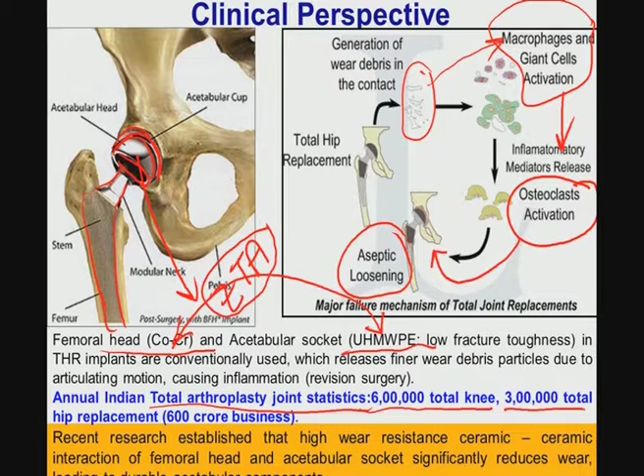Just to give you an idea of how badly the clinical fraternity needs this femoral ball head development: in India itself, according to the total arthroplasty joint statistics, 6 lakhs of total knee and 3 lakhs of total hip replacements are currently conducted. And we have also discussed in one of the earlier modules that we have developed some new material for the acetabular socket, HDPE-HAP-alumina.

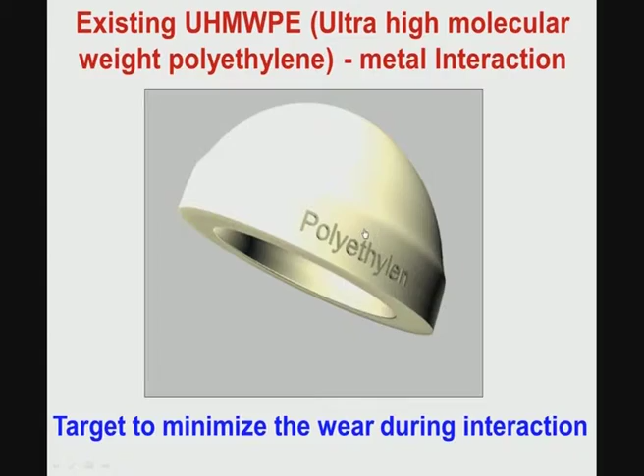So, this is essentially the existing ultra-high molecular weight polyethylene socket, and what we have done is essentially lab scale research to produce different simple shaped materials. So, this is a 10 millimeter diameter cylindrical shape, then you can do 20 or 30 millimeter cylindrical shaped samples as well as some rectangular bars of 40 to 50 millimeter. Now, all these simple shaped materials were developed to measure a number of material properties like hardness, fracture toughness, wear resistance, initial cell compatibility study and so on.

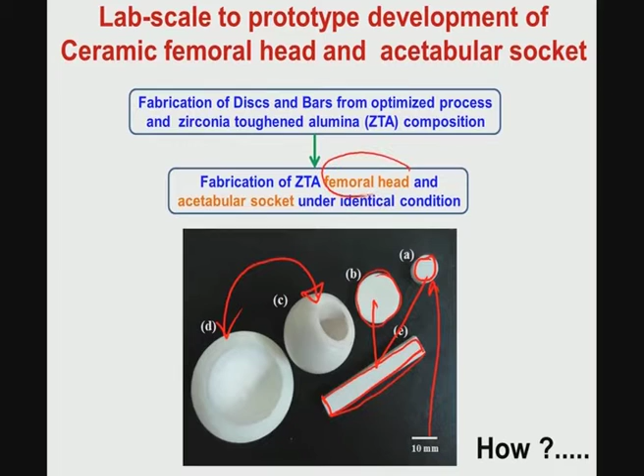But the real challenge is to make these kinds of geometrically complicated shapes, which is not very easy, and often you cannot use the lab scale processing conditions. You cannot adapt the same lab scale sintering conditions to fabricate this kind of acetabular socket or femoral head. So, one has to tune or tailor the lab scale conditions to produce this kind of geometric shape. Now, for this fabrication of the ZTA femoral head and acetabular socket, I will show you at least the femoral head.

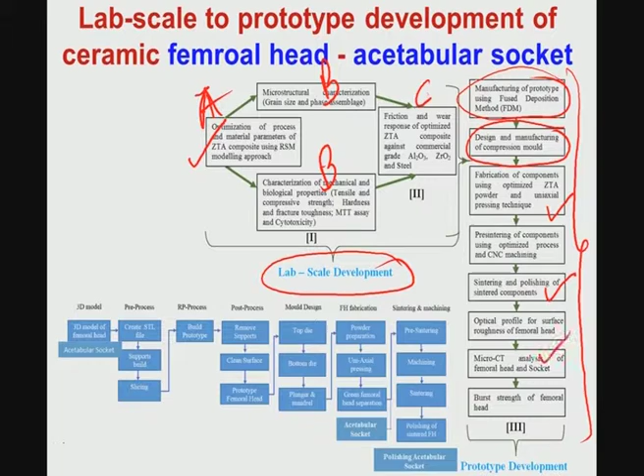And this is the kind of prototype development. It starts with the fused deposition method, FDM, or design and manufacturing of the compression mold, then ZTA uniaxial pressing conditions, which I will explain to you slowly, and sintering and polishing conditions, polishing of the components, optical profile and micro-computed tomography analysis of the femoral head and socket.

Now, there are some earlier results or earlier reports. Many of them are not available in the open literature, because these are patent disclosures or invention disclosures, and these patents are filed in different countries around the world like Japan, France, USA, Germany and China. So, as you see, from 5 different countries we have taken 5 different patents just to illustrate the current status of femoral head development.

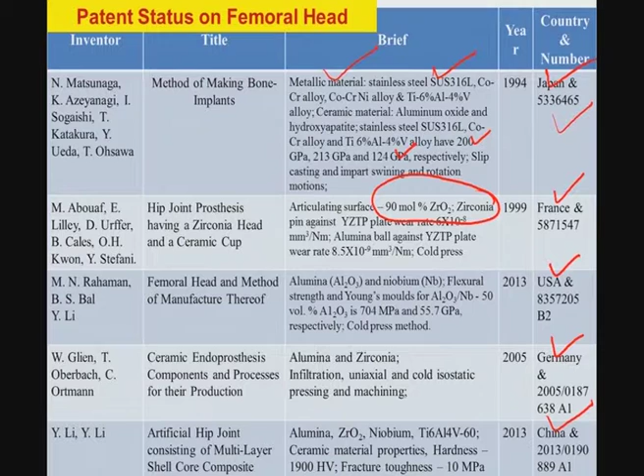Now, mind you that these materials that are patented are mostly either metallic materials like stainless steel or cobalt chrome alloys and so on. They have certain hardness, elastic modulus and strength values, or people have done some 90% zirconia, and one group in the USA developed niobium doped or niobium reinforced alumina, and they have reported the strength and elastic modulus somewhere at 704 MPa and 55.7 GPa.

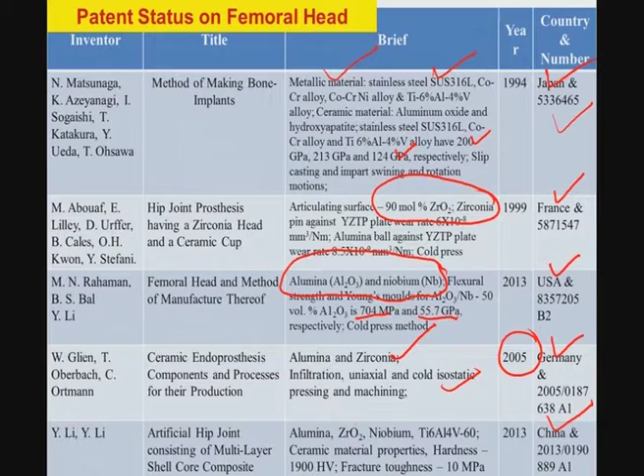One group in Germany patented in 2005 alumina-zirconia with uniaxial and cold isostatic pressing and machining. And another one in China is alumina, zirconia, niobium and Ti-6Al-4V based materials. As I said, the first step for prototype development is the engineering design.

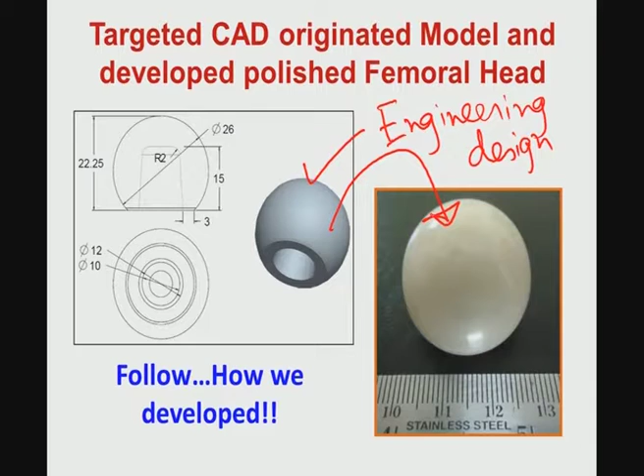So, I am showing you the CAD design file of these materials, and you can see the various dimensions mentioned. Ultimately your aim is to translate the design concept into the prototype product by an integrated manufacturing protocol. So, here again you first have to develop the mold where the ceramic is to be fabricated, and this mold is made by the FDM technique, which is a rapid prototyping technique. You can use ABS as the polymer, which is a very standard polymer used in this prototype fabrication process.

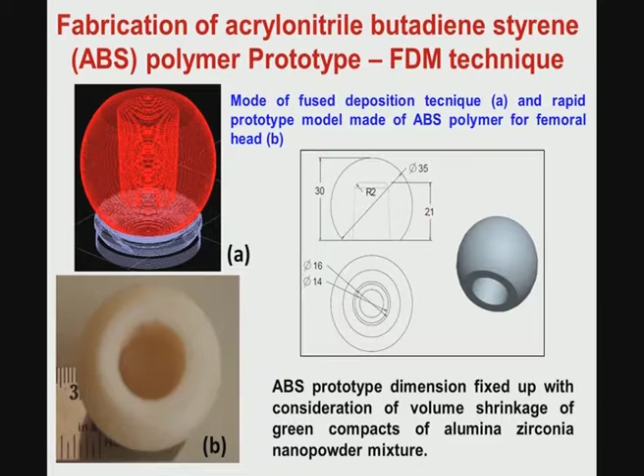Now, after that you do the prototype fabrication, then you make the zirconia and alumina green compact, and then you can do pre-sintering. Green compact means a large uniaxial compaction pressure is applied to this femoral head material to make the green compact. After that you can do the pre-sintering, which can be done at 1200 degrees Celsius and so on.

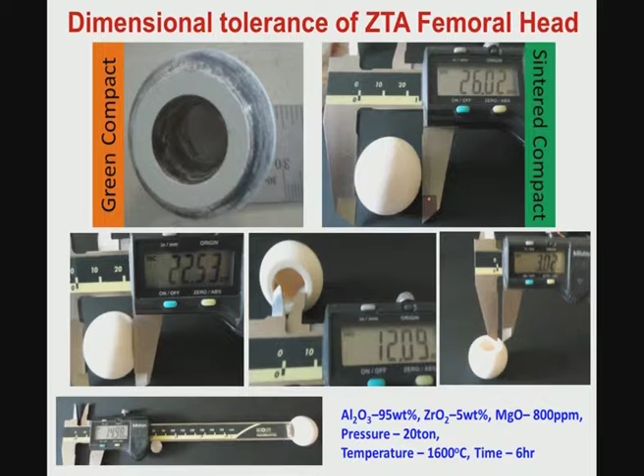And if in the pre-sintered stage the sample goes a little bit away from the original dimension, then you can do very mild machining, because pre-sintered is not fully sintered, but it is good enough that you can do a little bit of machining. So, tailoring the intermediate machining process is very important, and after that you do the final sintering, and then you get the typical wall thickness of this femoral head.

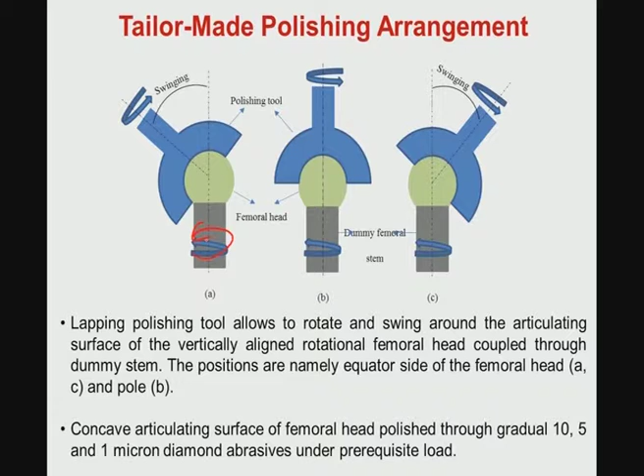Now, one of the important things in this entire manufacturing process is how you polish the final outer surface. This is not simple polishing, because it is not flat sample polishing but curved sample polishing. So, you have to use a swinging type polishing tool, which alternates its position during polishing in a reciprocating motion, and the entire femoral ball head also needs to be rotated during the swinging of the tool. With this technique, you can get the outer surface of the femoral ball head in the right polished condition.

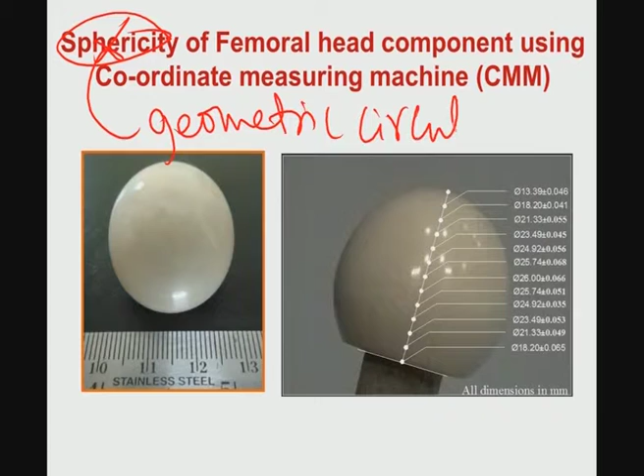Now, one has to measure the sphericity of these materials, which we also call geometric circularity. In this geometric circularity measurement, you can find out the different dimensions of these materials and how smoothly they are polished.

At different points you can measure this and see what is the design file and what is the product file.

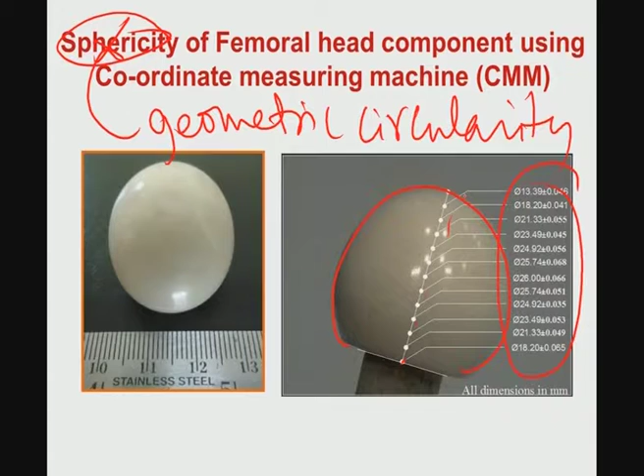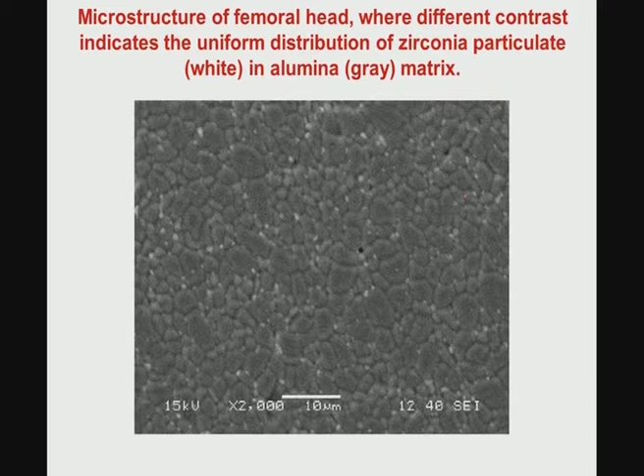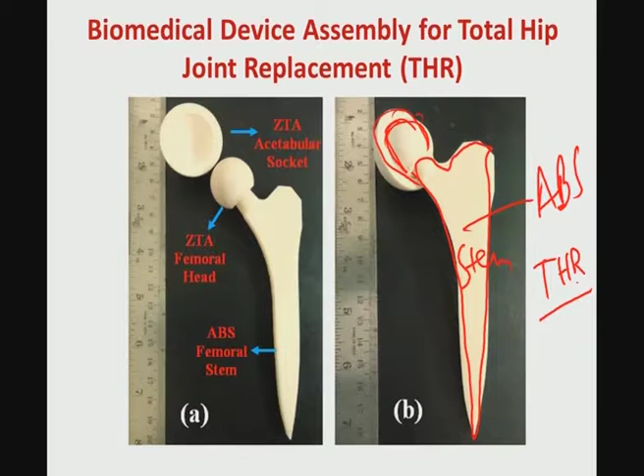Now, just to show how this entire assembly will look, you can make this femoral stem with the help of ABS prototype polymer. Then you can make this stem prototype, put the neck of the stem prototype into the femoral head, and see the geometric conformity of the femoral head with respect to the acetabular socket. So, you see how this entire THR assembly gets fitted with respect to the design file in the actual scenario.

If you compare with commercially available materials, this femoral ball head with this particular process costs at least 1/3 to 1/4 of the cost. Again, this is a very rough estimate, but it shows that the processing approach or integrated manufacturing protocol that we have adopted will be scalable and commercially viable, and is a cost effective technique in the present scenario.

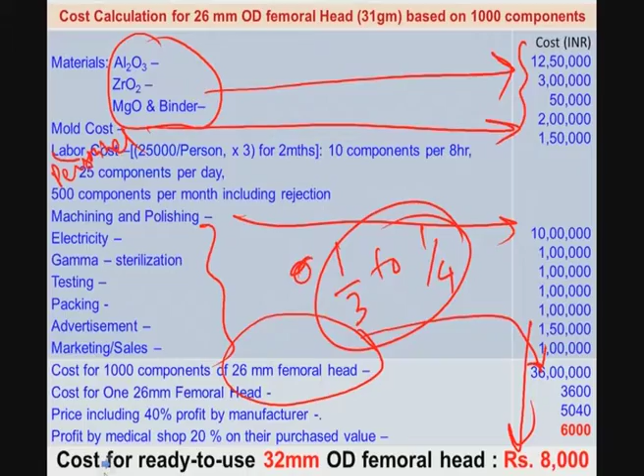Now, this brings us to the end of this particular module, but before I close, I need to summarize this entire course quickly, and I want to do this without any slides, just to give you my own perspective.

So, the first thing in any biomaterials development, you have to design that biomaterial, and designing the biomaterial essentially means you have to first identify the clinical need. In the context of orthopedic applications, first one has to interface with the orthopedic surgeon or the dentist or the prosthodontist and so on.

Then you identify what is the clinical need, you understand what is the clinical need, then you see what are the existing material options. Now, once you know what the existing material options are, you also have to know what the problems with the existing material options are. Once you know the existing problems with the currently clinically used materials, then you have to innovate how new materials can be developed, new materials that you can research in the laboratory and take further.

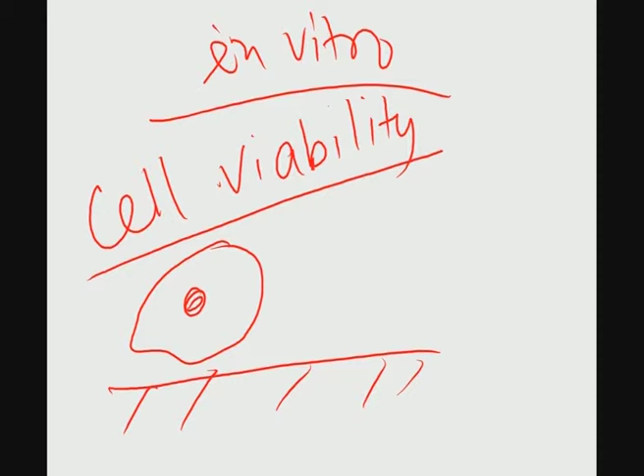But in today's world our understanding has developed and matured to an extent that, when a cell is adhering on a biomaterial substrate, one would first like to see the morphological changes of the cell, and, if you remember the protein adsorption and all those things that I have shown you, whether there is any visible change in the cell functionality, or any quantifiable measure of the cell functionality, when the cell is adhering and growing on the material.

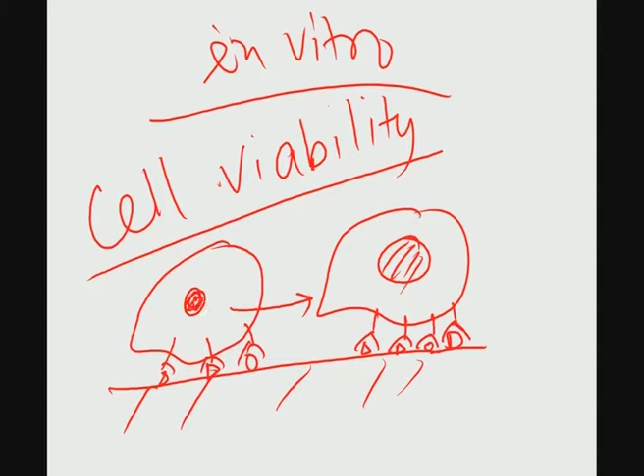So, as I said, any time the cell undergoes differentiation, this is not differentiation in a mathematical context; differentiation means differential gene expression. So, when differential gene expression has been there, it is to be quantified. So, differentiation essentially means differential gene expression. So, whether there is any change in the functionality.

So, if you develop some materials which have the best possible physical properties, and at the same time can not only be used as a cell growth substrate on which cells can comfortably grow over different time points in culture, but the same substrate can also be used for the differentiation of, let us say, stem cells towards bone cells, that is ideal for orthopedic or bone replacement applications. Those kinds of materials are much more attractive compared to conventional materials which can only support cell growth. I hope I have made this point rather clearly.

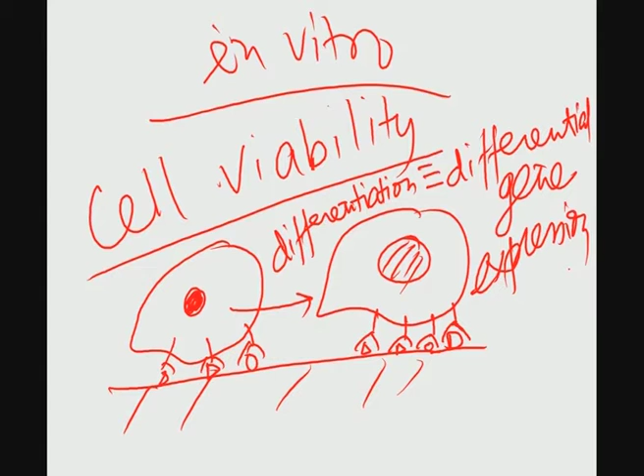Now, once you have done this in vitro, the next thing is in vivo. So, preclinical study is very important, and I have emphasized in some of the lectures the animal model and defect model. For bone replacement applications, the defect model people often use is the femoral defect model: you drill a cylindrical hole in the femur, implant your material, and then see what the bone regeneration is over different time points.

Another model, which I have covered in some of the modules, is called the segmental defect model or critical size defect model. All these defect models often provide complementary information on the bone regeneration capability around the material in a particular experimental animal. The other thing that I have emphasized in one of the earlier modules, and must repeat here, is that in vivo study for any new material that you have developed in your lab must go through a series of

animal studies. You have to first start with, let us say for bone, rabbit animal experiments. Once the rabbit experiments provide you satisfactory or useful results, or establish the tissue compatibility of the materials, then those small animal model experiments need to be validated in a larger animal model. So, first is rabbit, then you have to go to a goat model or sheep model. Okay.

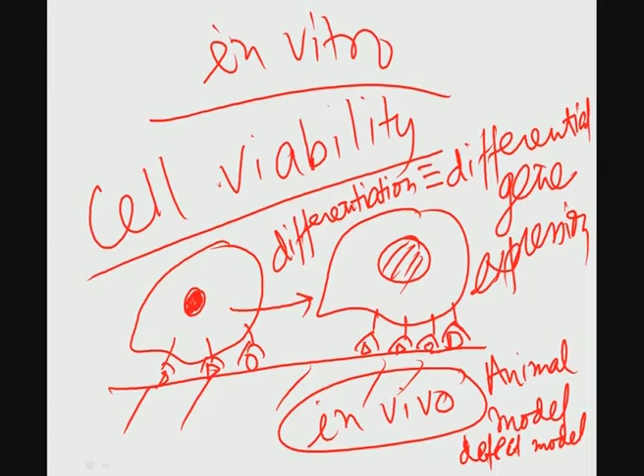Now, once you validate your lower animal test results in intermediate or relatively large animal tests, only then can you go for clinical trials in human patient subjects. Clinical trials are ethically quite challenging. One has to take approval not only from the institutional ethical committee, but also from the national regulatory committee. Once you do all those clinical trials, only then can that material finally see the light of day. Before that, you take national regulatory approval like the FDA in the United States or similar approval in other countries, transfer the technology to a biomedical company, and then the company can produce the materials in large numbers and sell them to hospitals and so on.

So, I think with this course I have covered a broad spectrum of knowledge with you, so that you are in a position to design your experiments, to understand and analyze your results in the light of biocompatibility evaluation, as well as design new materials and lastly new implants and devices, so that this research becomes very useful to society as well as a larger cross section of patients.